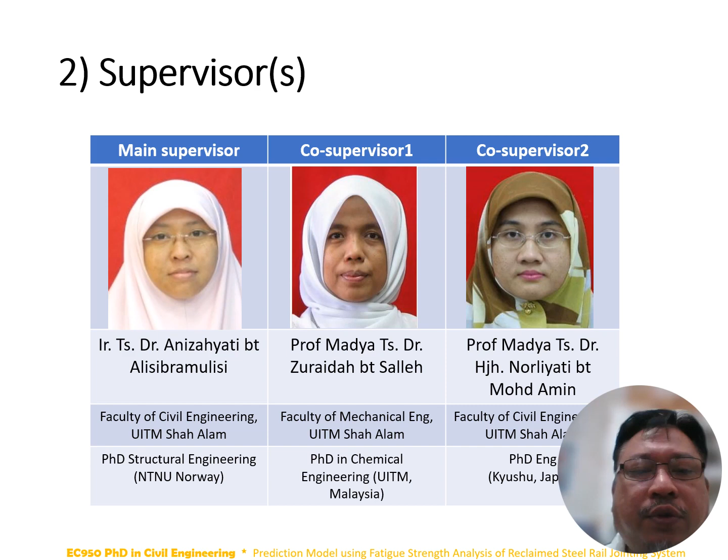My research main supervisor is Engineer Technologist Dr. Anizahyati binti Alisibramulisi, supported by two co-supervisors. My first co-supervisor is Professor Madya Technologist Dr. Zuraidah binti Salleh from Faculty of Mechanical Engineering UiTM Shah Alam. My second co-supervisor is Professor Madya Technologist Dr. Hajah Norliyati binti Muhammad Amin from Faculty of Civil Engineering UiTM Shah Alam.

My research title is Prediction Model Using Fatigue Strength Analysis of Reclaimed Steel Rail Jointing System. There are 5 important terms in this title.

The first term is prediction model, which is a process of using known result to create, process and validate, forecast the future outcomes. Second term is fatigue strength analysis or fatigue limit. It's a number of cycles of stress that a sample of a specimen can withstand without failure.

Reclaim, as a third keyword here, means a retrieval or recovered material that has been used subject to assessment. The reclaimed material, we must know the background of the samples or specimen, either is recovered from which site. We must have the history of the usage of this retrieved material.

The fourth keyword is steel rail. It's a pair of parallel bars made of iron laid on a prepared track. Roadways serve as a guide or running surface or superstructure of the track system. The final important keyword is jointing system. It's a splice connecting the adjacent ends of rails, could be in the form of welded or non-welded type. In this particular study, jointing system is the welded type.

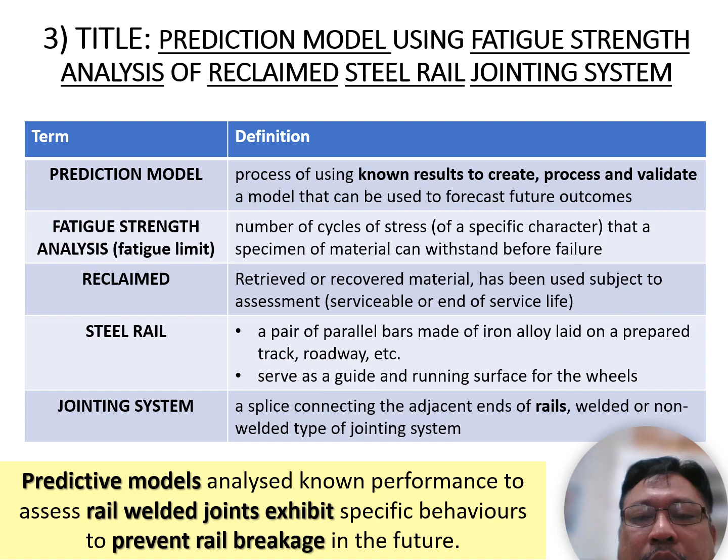For the title, in short, this research is about developing a predictive model that analyzes known performance to assess rail weld specific behavior in order to prevent rail breakage. I am now proceeding with the introduction to the study.

Railway system worldwide has been instrumental in facilitating millions of passenger trips and transporting millions of ton-kilometers of cargo around the world. A critical component of this railway system is the steel rail, which plays a vital role in securing and transferring vertical load to the ground while enduring rigorous rail-wheel interaction.

In the diagram on the left, the Q, the vertical load from the axle, is transferring over a wheel at a single contact patch. In this example, the axle load is 200 kilonewton, transferring half of the load to two wheels, which is transferring 100 kilonewton at each wheel over a small contact patch area of 1 centimeter squared.

This is very high stress experienced by a small area, which is around 100 kilonewton per centimeter squared, which is equivalent to almost 10,000 bars. The remaining portion of the load is subsequently transferred to the wider surface of the layer after the rail, which is the rail pad, the base plate, the sleepers, the ballast, and to the substructures underneath.

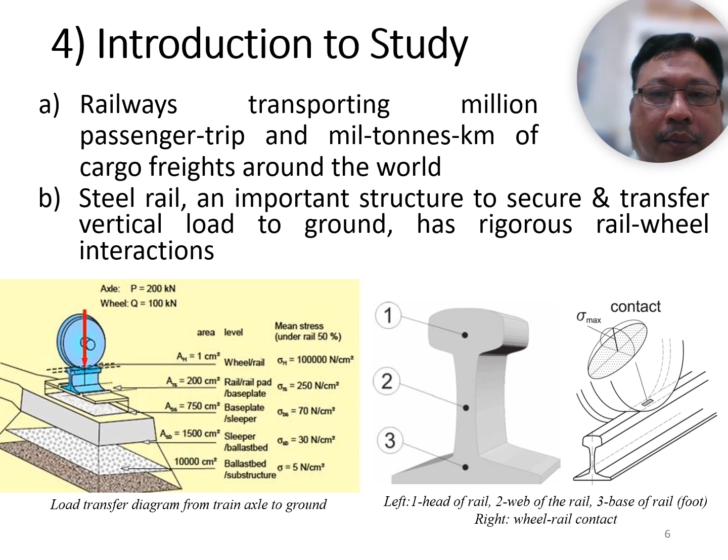Some railways have been used from its initiation of the project to the end of its life, which is very useful. But some of the railways have been used temporarily, have been recovered early for line upgrading, and still retain plenty of useful life. For example, we have our Malaysian experience, Ipoh Padang Besar single line upgrading works, which only used for less than 3 years for 330 kilometer track.

At that time, the usage of the rail was around 17,000 tons, and it is worth around 54 million of steel. This is some kind of good strategy taken by our government to reuse this reclaimed rail for another project. We have another example, which is Klang Valley Double Track KVDT. It's a route from KL station to Klang, Salak South to Seremban, and Simpang Port to Port Klang. This track is about 260 kilometers.

The steel itself is around 28,000 tons, and the price of the steel is around 84 million. It operated from 1995 and experienced rehabilitation works in 2016, only after 22 years of operation.

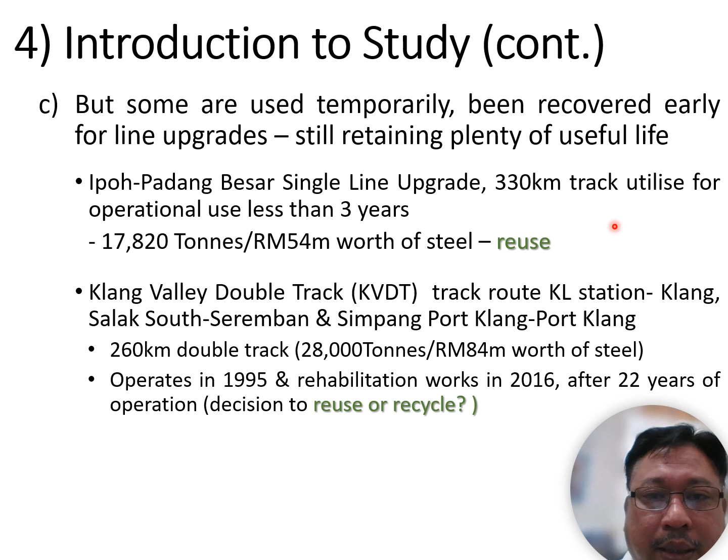There are still pending decisions either to reuse or recycle the steel rail from this project. Some railway lines remain in operation until the end of their designated service life. For example, a 20-ton railway line that has been in service for 30 years can be reutilized for a lower tonnage line of 10 to 13 tons, as steel has a unique characteristic: it has an indefinite service life and a lower stress limit.

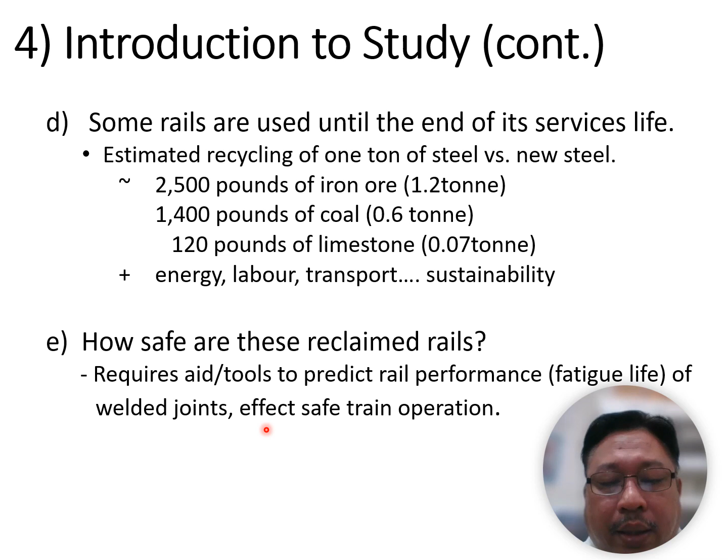So how safe are these reclaimed rails? It requires aids or tools to predict the performance and fatigue life in order to make sure the welded joints are safe for train operation.

Item number 5 shows the major milestone of my research. Out of 7 items, 3 of them are already agreed without changes. These are the problem statement, objective, and scope of studies.

The 4th item requires review and further expansion for thesis write-up, which is on the prediction model and model improvement. Other items still in progress are the literature review, data analysis, and finite element modeling to simplify the input-output model for comparison to industry. The following slides cover the major research milestones briefly.

What are the issues in these studies? The issue is the use of reclaimed rails in the railway track. Some railway track definitely cannot be used, but most of them are serviceable track material. For example, in a 1 kilometer track, there are about 80 weld joints, and each joint needs to be proven either usable or not.

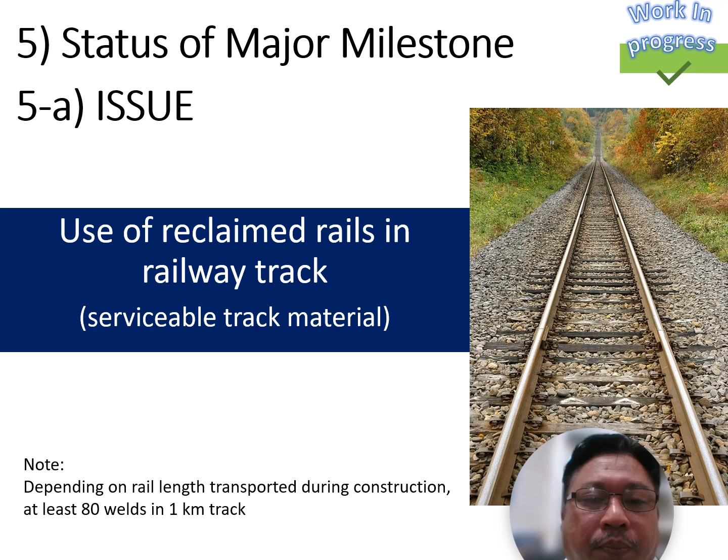How does this issue of using reclaimed rails become a problem? Reclaimed rails have been perceived as not good material. They have been discarded and perceived as high risk due to unknown conditions. In the UK, they are considered to have low safety performance, so most reclaimed rails are being recycled.

There is another approach in European railways, where Swiss railways reused more than 30% of track materials after assessment, and most of them are still serviceable. Malaysian Railways donated our track from Ipoh to Padang Besar for the Singapore-Kunming line, and it is still serviceable.

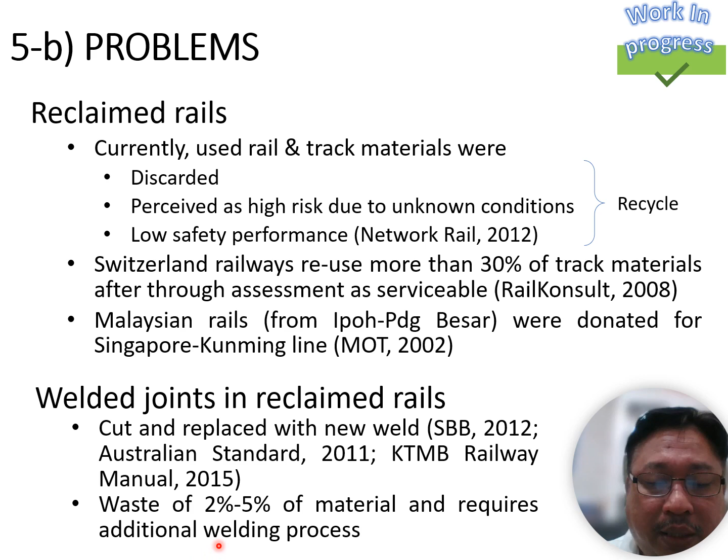Welded joints in reclaimed rails have been cut and replaced with new weld. Some standards really avoid using reclaimed rail welded joints, and this is considered a wastage of 2 to 5% of material, requiring an additional welding process to rejoin the cut rail.

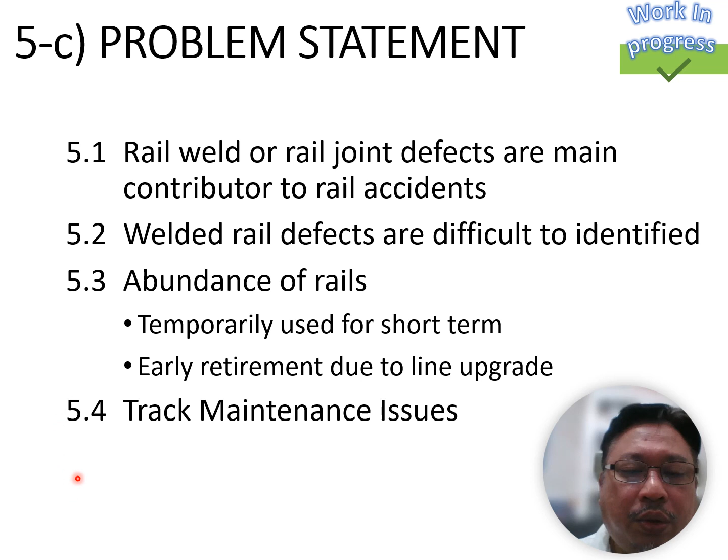There are 4 problems when considering using reclaimed rails. First, rail weld or rail joint defects are the main contributor to rail accidents. Second, welded rail defects are difficult to identify. Third, there is an abundance of rail that has been used temporarily, and some rails that have been retired due to line upgrading. Fourth is the track maintenance issue.

The first problem when considering reusing reclaimed rails is we need to understand the rail defects. A study by Liu on rail derailment in the US over 10 years, from 2000 to 2010, has come out with this statistical data.

Broken rail occurrences and broken welds have more than 50% higher severity than the average of occurrences. In terms of frequency, broken rail and other defects were recorded almost 9 times higher than the average of other defects. So based on this statistical data, broken rails or broken welds dominate both severity and frequency of rail defects in the US.

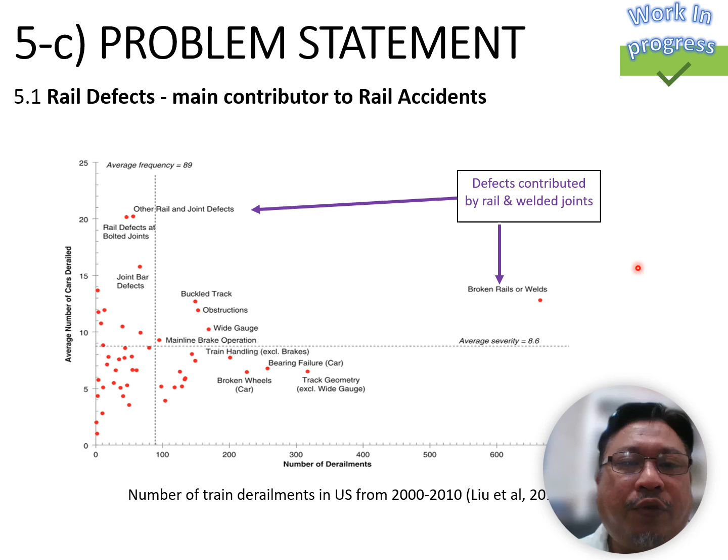On the second problem statement, welded rail defects are difficult to identify. A rail has 3 distinctive parts: the head, the web, and the foot. For a typical UIC modern rail, the head thickness is around 50 mm, the web thickness is about 16 mm, and the foot is 144 mm wide.

Ultrasonic detection or transducer requires 3 different angles - 70 degrees, 40 degrees, and 0 degrees - to penetrate the whole rail, and requires a skilled worker to interpret the results. The process is also very slow and time consuming.

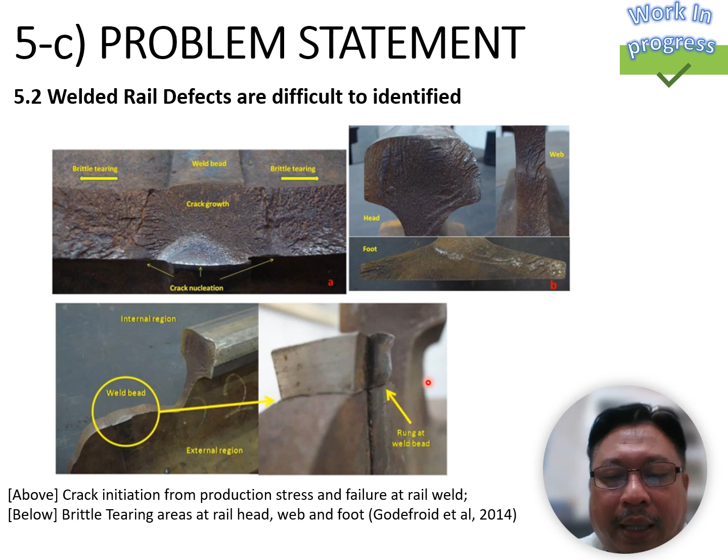So these are the defects that occur at the weld joint and weld bead, and most of these need to be analyzed using the ultrasonic inspection machine.

The third problem when considering reuse of reclaimed rails is when we consider using early retired rail due to upgrading or temporary use. The trend in the world is changing towards using higher carrying capacity.

Since the inception of railways, operators have desired to increase their load carrying capacity. From early days of 40 tons, it increased to 80 tons, and now in the US they are carrying about 180 ton payloads. This is an increase of more than 400% in carrying capacity from the inception.

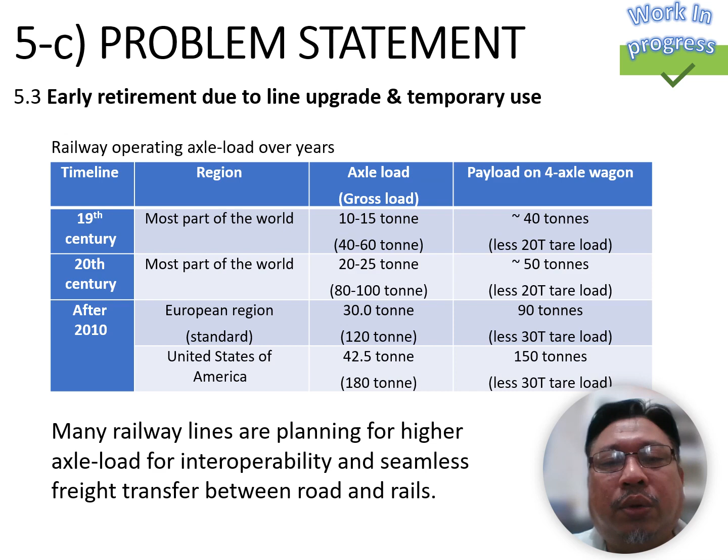To reuse this steel rail, we need to do an assessment. The fourth problem regarding reuse of steel rail material is that maintenance of the track itself requires a major undertaking. It requires full scale machinery, workers, and spares to make sure the line is always in operation. It also requires regular rail grinding to minimize surface crack formation, and important internal crack inspection using ultrasonic machines. So the use of reclaimed rails needs to be supported by tools or a basis to understand the remaining life of the steel before it can be reused again.

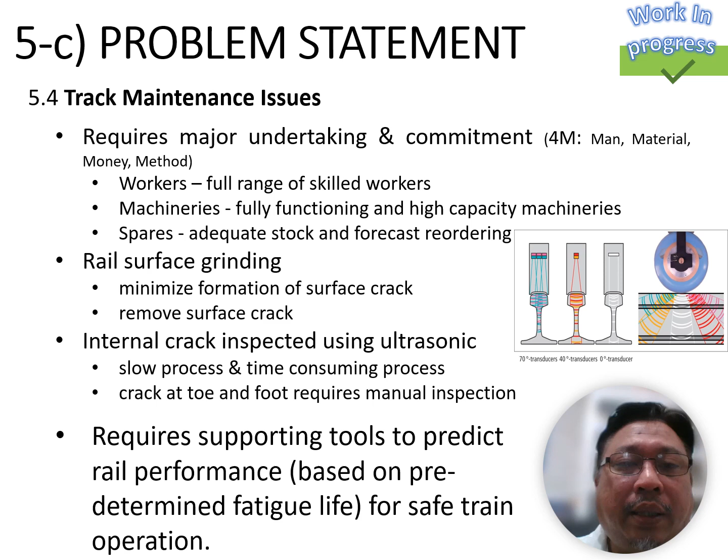There are 5 objectives in this study. First, to analyze the fatigue stress of steel rail. Second, to determine fatigue life of reclaimed steel rail joint. Third, to establish the relationship between fatigue life at the rail joint. Fourth, to establish a prediction model based on performance of residual strength. And finally, the study will establish a fracture control plan using numerical analysis of reclaimed rail joints to deter or minimize rail joint breakage occurrences.

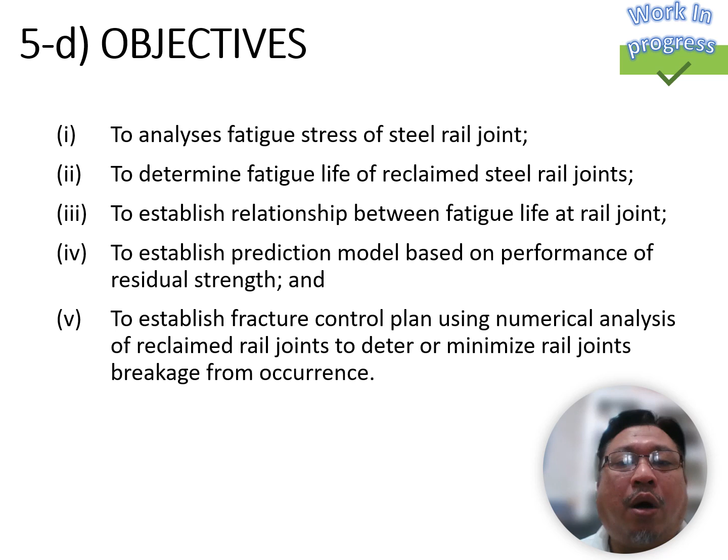For the scope of study, the research will perform experimental investigation on welded joints. There are two areas under study: mechanical properties such as chemical analysis and surface analysis, and mechanical performance of the welded joint such as bending and fatigue performance of parent rail and welded joint.

The second scope of study is to study the crack analysis for its initiation and propagation of failure using scanning electron microscopy. The third scope of study is to assess welded joint strength based on microscopic analysis and empirical formula for trends in fatigue development, failure occurrences, and relationship with fatigue.

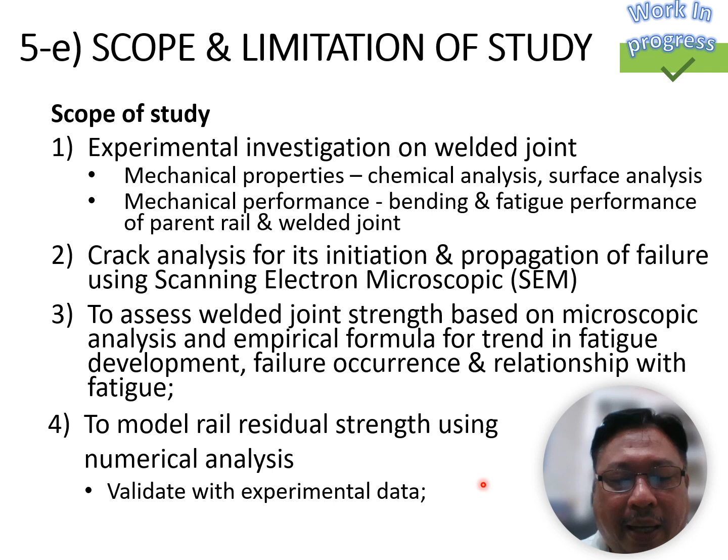The fourth scope of study is to model the residual strength using numerical analysis and validate with experimental data. The final scope of study is to establish a fracture control plan for rail operation throughout the rail life cycle in order to minimize failure.

We need the train schedule, train type, train loading, and train speeds to arrive at this, and this can be obtained from the railway operation. There are also limitations to this study. We have a quite limited number of samples and it has to be optimized. Second limitation, we have limited access to laboratories capable of performing required tests according to proper standards. And it is a considerably long lead time to perform a cyclic load test to get a full range of limits.

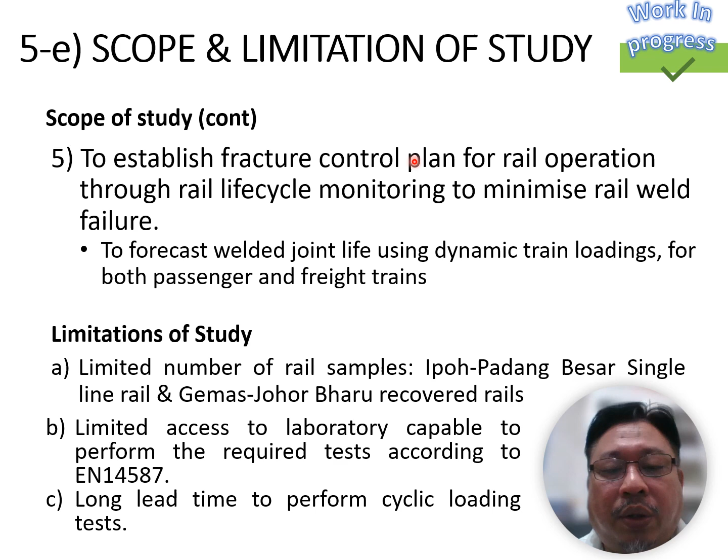On the literature review, there are many references relating to defects of welded rails and surface crack initiation. Farhangi and Mousavizadeh 2007 concluded that even though flash butt welding is superior in quality compared to aluminum thermite welding, it still has failure issues due to horizontal split fracture. Saarna and Lansoo 2004 found that even though flash butt welding failure is low at 7.9%, most studies found that underlying surface crack removal will cause the crack to propagate. So if we don't remove the underlying crack, it's going to propagate and contribute to rail breakage.

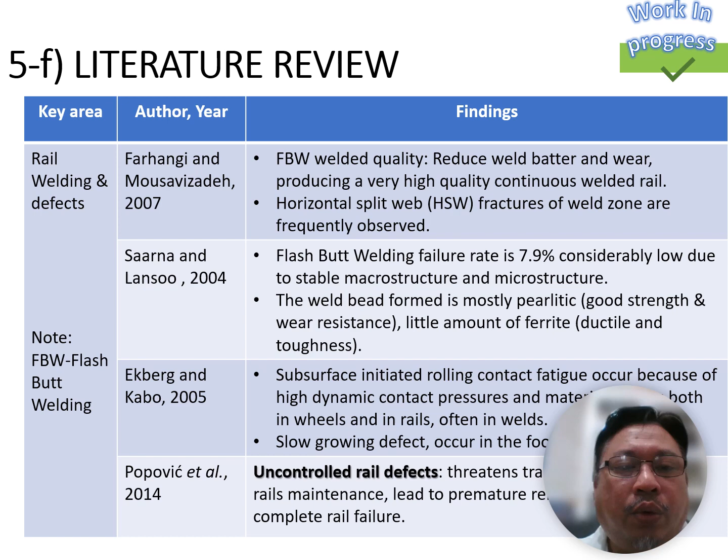Ekberg and Kabo, in an experimental review, observed subsurface-initiated rolling contact fatigue occurring because of high dynamic contact pressure and material defects in both welds and rails. The slow growing defects occur in both the foot and the web. Popovic et al. 2014 emphasized the trend of uncontrolled defects which can threaten traffic safety, increase rail maintenance, and lead to premature removal of rails or, in the worst case, complete rail failure.

Vesković 2012 outlined that surface cracks happen during rolling contact fatigue and plastic flow due to high stress at a small surface area. Furthermore, operation-induced factors such as train speed, axle load, traffic density, and poor maintenance regime play important roles in the propagation of the defect.

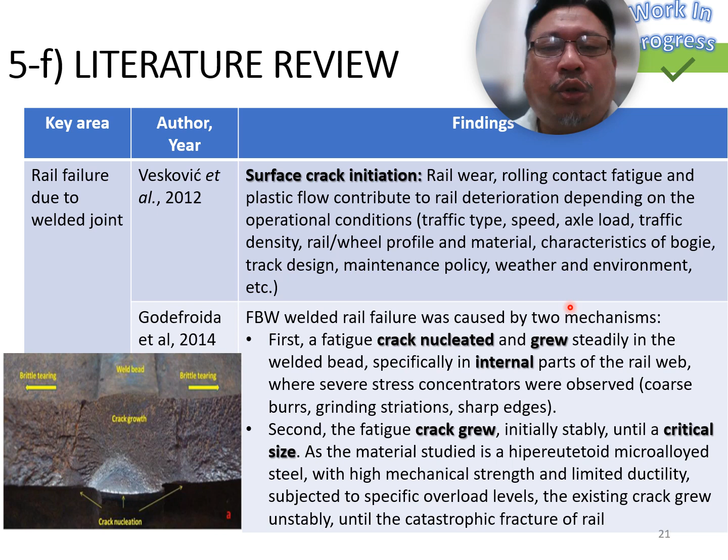The author has referred to some literature review on use of reclaimed materials. Brinckerhoff in 2012 mentioned that reclaimed rail can be used as relay rail, inserts and closures. American railway standards also mention that reused rail must follow the standards and needs to be used according to its previous function — straight track rail used at straight track, and curve rail at the curve. RailKonsult 2008 mentioned that in the UK it is not common practice, but in Switzerland it has been widely used heavy industry practice for reuse of reclaimed materials.

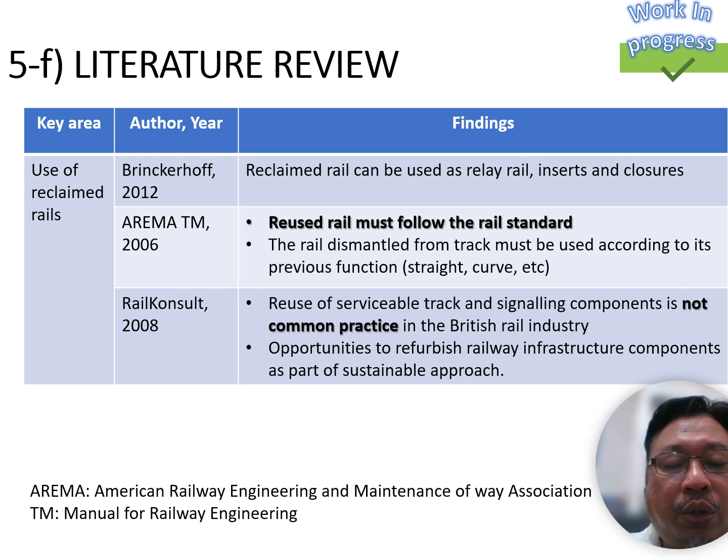On prediction techniques, the author extended additional review. As per analysis, it shall not lack dependence on loading and specimen geometry. This is suggested by Miner in his 1945 literature, and G. Ayoub et al. 2010 and Suresh 1991 agree on the application of rules of linear cumulative damage extending to continuum damage mechanics. This model needs to be associated with finite element modeling, which was not included in my previous model.

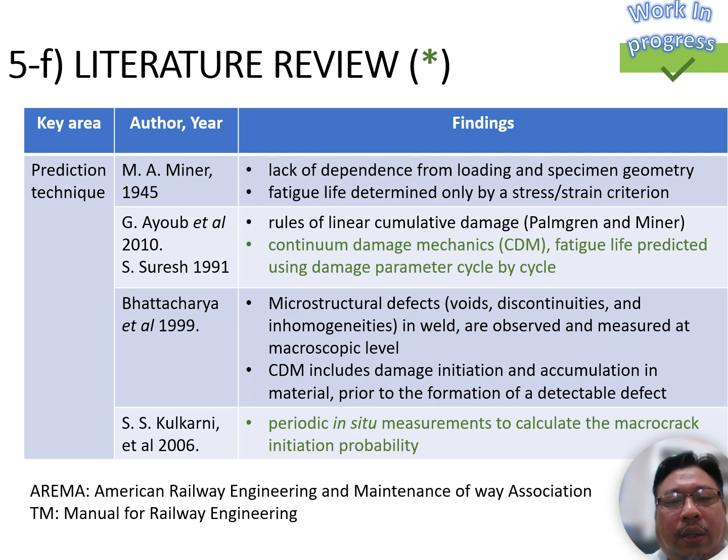In addition, Dahlberg 2003 also needs to include multi-axial loading, as the railhead experiences lateral and vertical deflection including rotation. This is the improvised version of my model that has been developed throughout this semester.

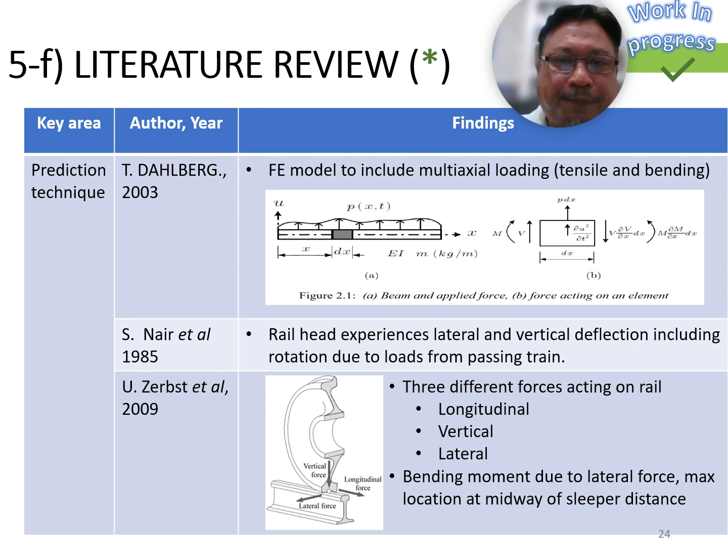For the conceptual framework of this study, there are two inputs required: experimental data acquisition from the experiment, and numerical analysis from the modeling. Both are compared and validated for results, and then the output of the welded joint is optimized using all the nodes and boundaries.

This input is then applied to the operational load and continuum damage mechanics function, and we perform updated finite element analysis, then simplify the input-output model for the fracture control plan.

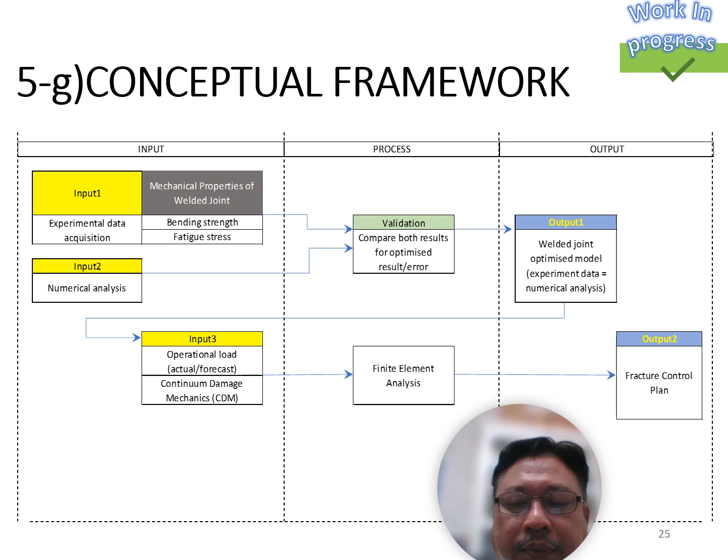This is the flowchart of the methodology: experimental data compared with numerical analysis, and then the model is subjected to loading from the actual rail. If the values are within range of the experimental data, it is validated, and further data comparison is done using actual train loading from the railway industry.

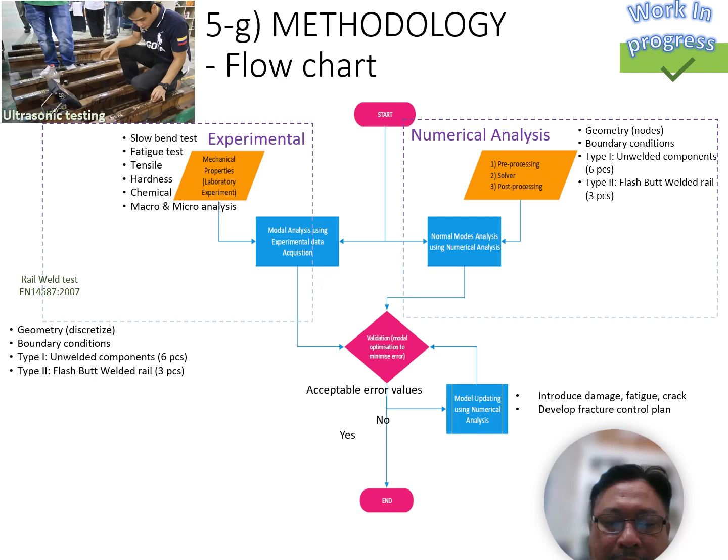I'll go briefly through the methodology. There are 4 major tasks: document and reference study, experimental work, numerical analysis, and development of the prediction model and fracture control plan.

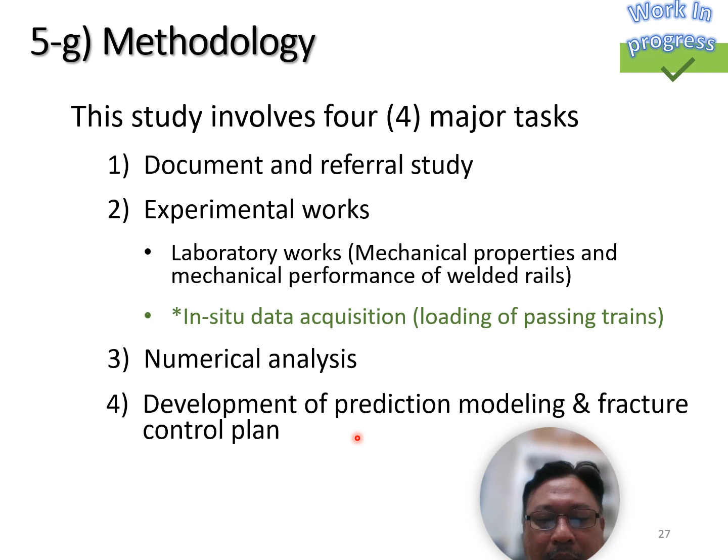In the document and reference study, previous studies and gap analysis are performed. We analyze the welding procedure at site, and study the history of recovered material usage from the user.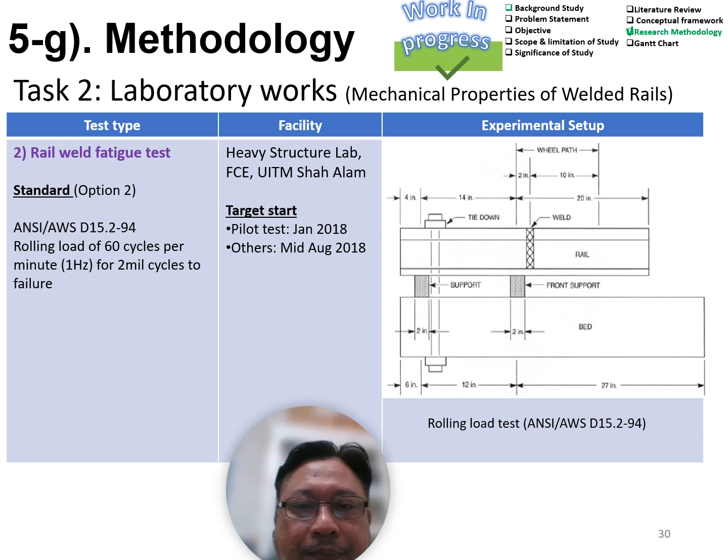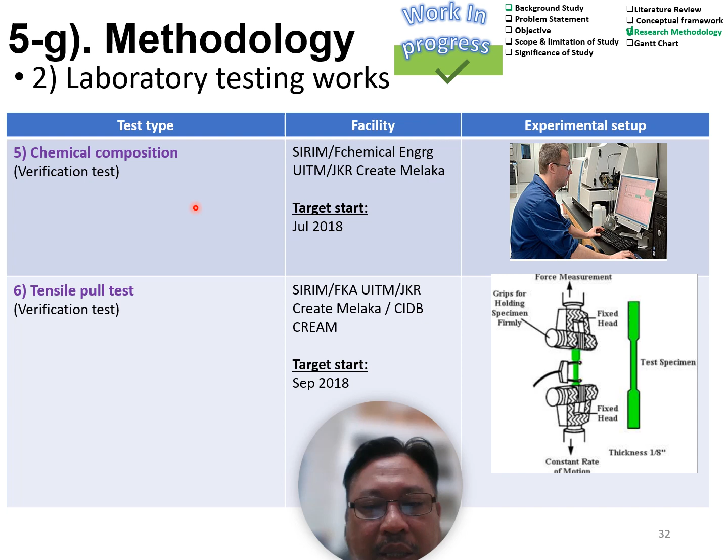Other mechanical properties tests include hardness test, macro and micro examination, chemical composition test, and tensile pull test, to validate the data.

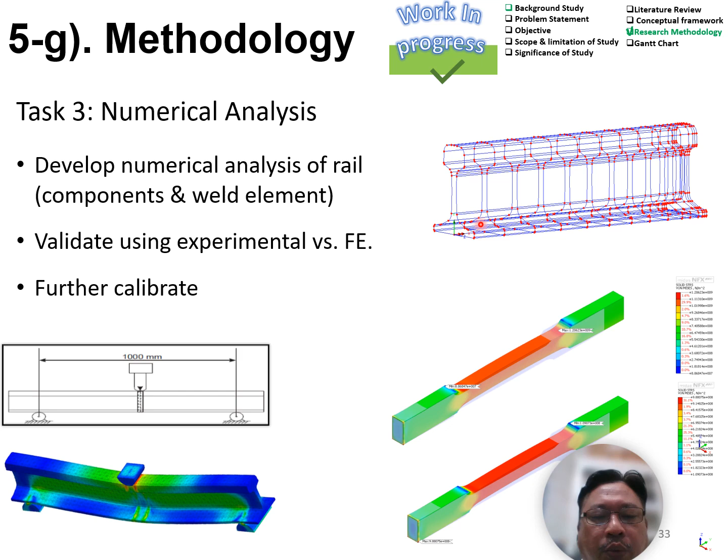The third task is numerical analysis. We put in all the profiles for each rail and subject them to the nodes and boundary conditions. This will be calibrated further for best results.

The final task is to come up with the predictive model and control plan, introducing load and damage such as fatigue and cracks in weld joints, to optimize the model to predict fracture.

This is simulated over actual train loadings - train types, density, speeds, and axle load. All this data will be simplified so users can input their information and get the analysis using the simplified system.

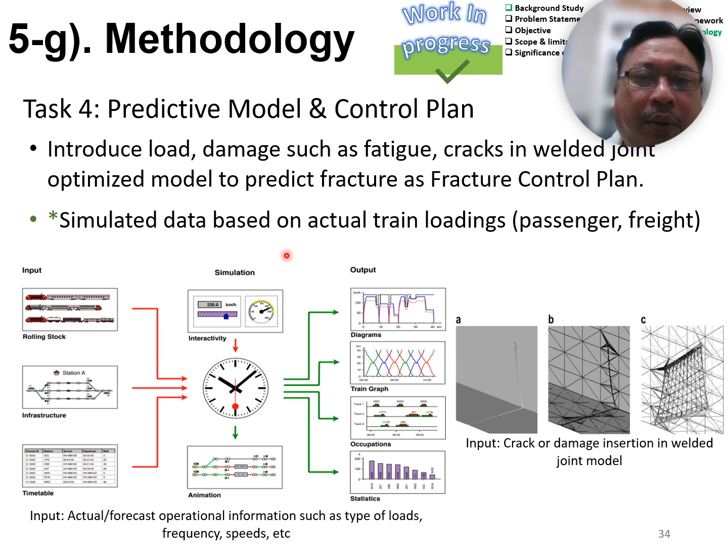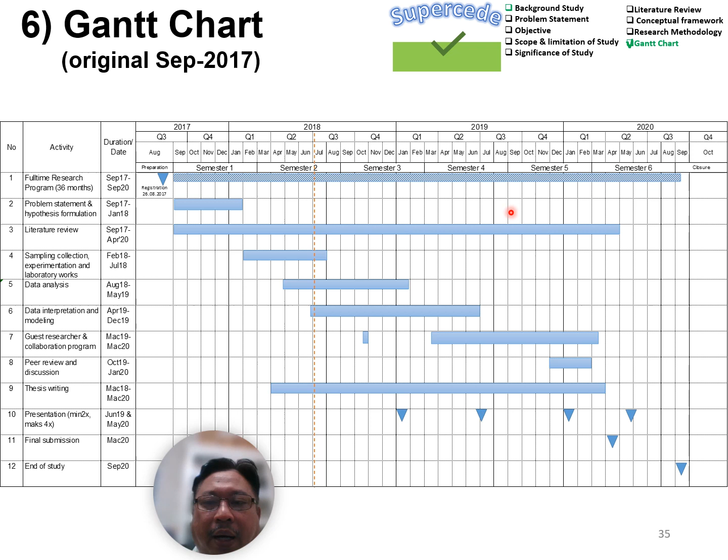This is the initial Gantt chart of the study from September 2017, but it has been revised due to the pandemic and other unforeseen events. This is the revised Gantt chart with completed tasks.

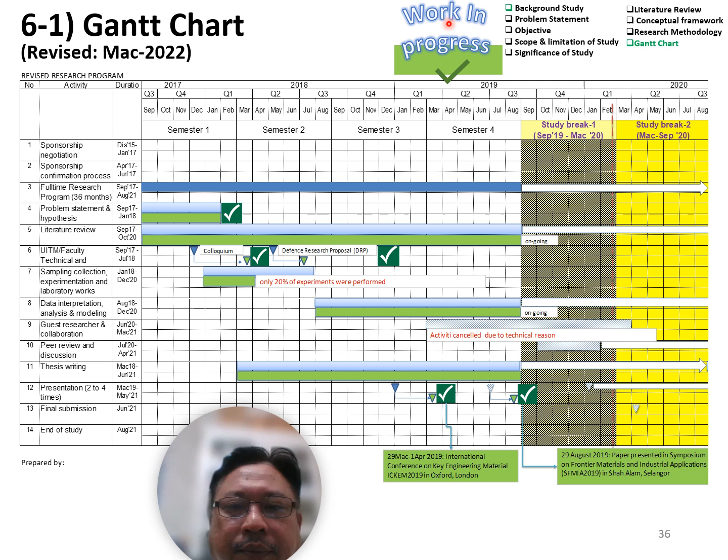This is my 9th semester of study. As of now, there are 4 ongoing tasks: literature review, data interpretation and modeling, thesis writing, and final submission for my viva. Hopefully, if Allah permits, everything will be completed by early next semester.

As for the status of publication, there are 3 publications completed and 1 currently undergoing the drafting stage.

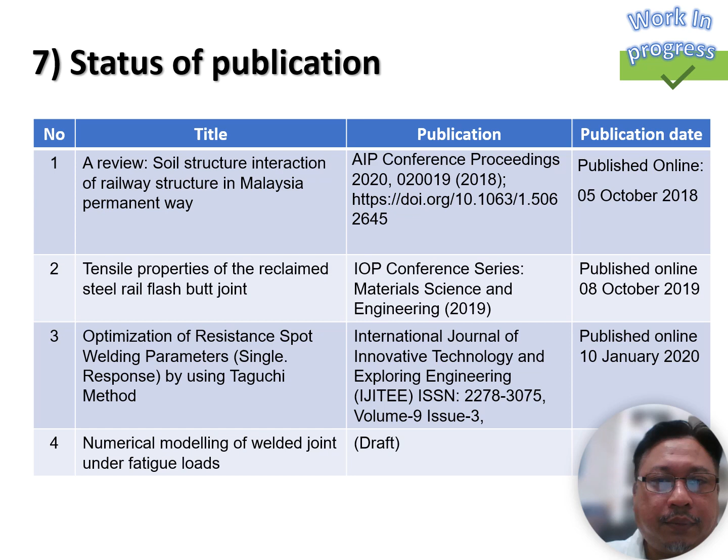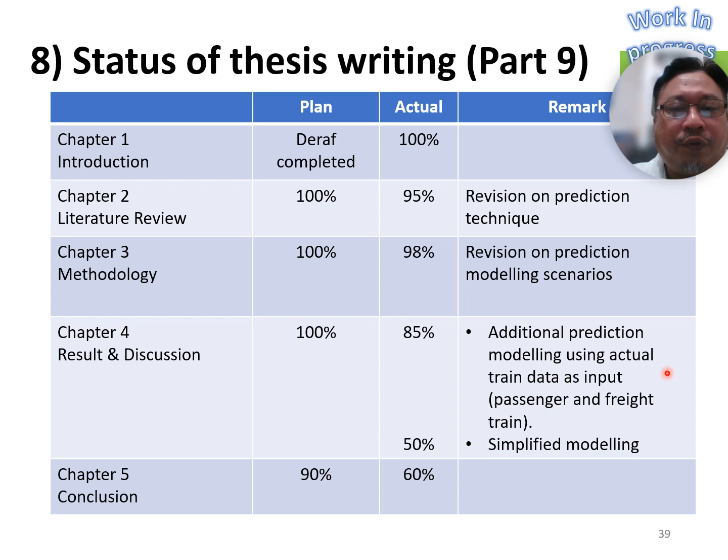As for the conclusion, it will follow after we get very fruitful input from the results and discussion.

So everything will be completed by next semester, around March or April, inshallah.